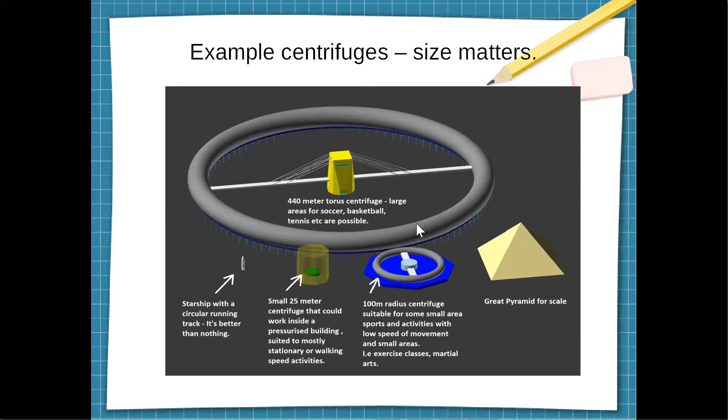So this is the first slide. I wanted to give an idea to people of how large a facility this would need to be. So with a small centrifuge, you basically have to stay in one place because the curvature of the acceleration as you move about is quite significant. So a small centrifuge can't have large open spaces, but a small centrifuge is still fine if you just want to be able to sleep or sit at a desk. So I thought initially on Mars, a small colony might have a small centrifuge, which is inside a building, much like the ones NASA use for their training.

They might be bigger than that, but generally you can't move around much, and there are significant distortions in the way the gravity works. So the next step up from that, I should go back actually. When the settlers first arrived, they may actually be in a very small spacecraft, or actually it's quite large, a starship, similar to what Elon Musk is envisaging. In a craft that size, you can have a running track where people would run around the track. And if you sprinted fast enough, you would actually generate a centrifugal force equal to Earth's gravity. So that would always be available to anyone on Mars who arrives on the surface.

In future, they would go to the next size torus, or this facility here, and then they might build something bigger. And for scale here, I've got a picture of the Great Pyramid of Giza. So it is a significant amount of materials and effort to build something this big, but if you're aiming to have a city of 100,000 people or something, this scale of building becomes feasible.

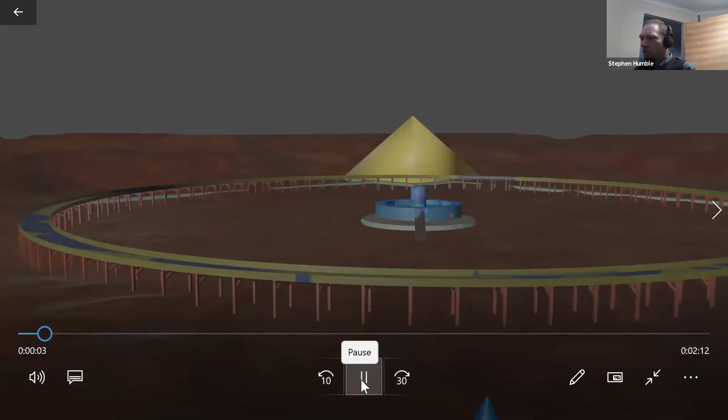Now, I think what I'll do next is I'll bring up the video I made. So this little guy here, can you guys see that? I hope so. He's supposed to be about the size of a 1.8 meter tall fellow, and behind him is a starship. And I'll play the video, and this gives a run over. So we zoom out. There's the foundation of the centrifuge. It's got a center hub and an outside running track. There's some motors, which are kind of like train motors.

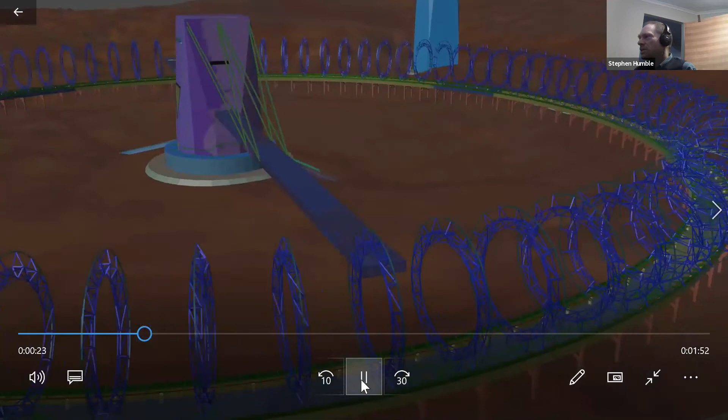Then there arrives the outer hull of the torus and the central hub and an access bridge. The access bridge is in part supported by suspension cables. Inside the torus, I've hidden the outside hull for now. There are frames, and in those frames, we have large sectors which are able to rotate so that as the torus speeds up, they can tilt so that people always are standing on a flat surface.

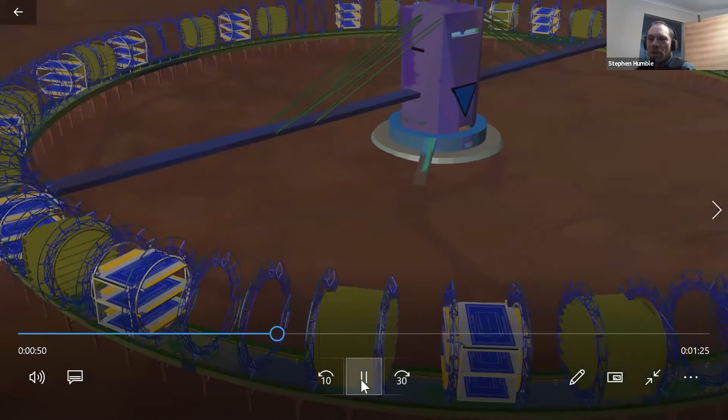Now, this thing is absolutely enormous, about 250,000 tons, but it gradually speeds up. And as you see here in the video, it's slowly speeding up. In reality, this would probably take over an hour to reach full speed. And we'll show you how it works down here.

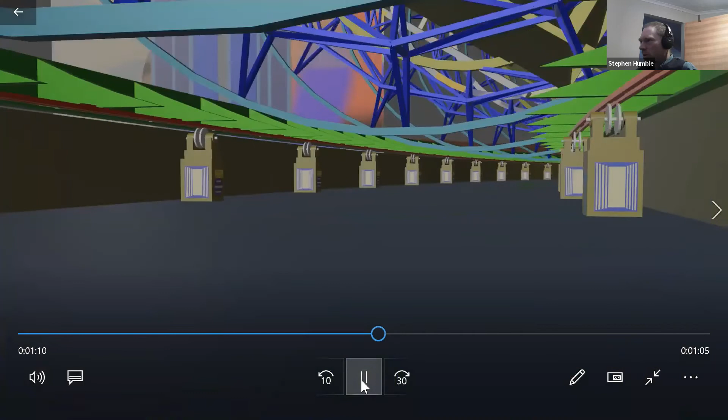So underneath, we've got a train track style system, and this area under here is actually going to be pressurized at about 15% of Earth's atmospheric pressure. And that helps support the enormous weight of this torus as it spins. So it's kind of like a hover train or a hovercraft.

Then in the central hub here, we'll walk along the ground here, and you can go up a ramp. And at the center of the hub, even though the outside is going to be spinning at about 230 kilometers an hour, the center hub is only doing about 20 kilometers at the point where we enter it. So you can basically jump over that and get into the moving part of the system.

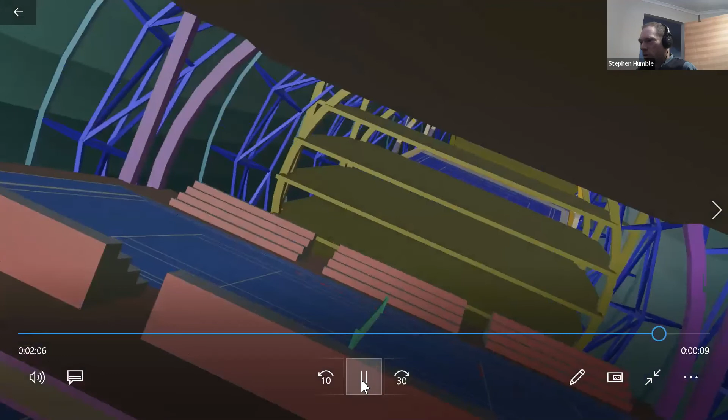Then we can go up here to these access arms. There would be airlocks and so on in this system, of course. I don't show these in the video. But we travel down to the center, down the access arms, and then inside the torus, we have the sector pods, which are at this point where we're doing 230 kilometers an hour, tilted at an angle of 70 degrees.

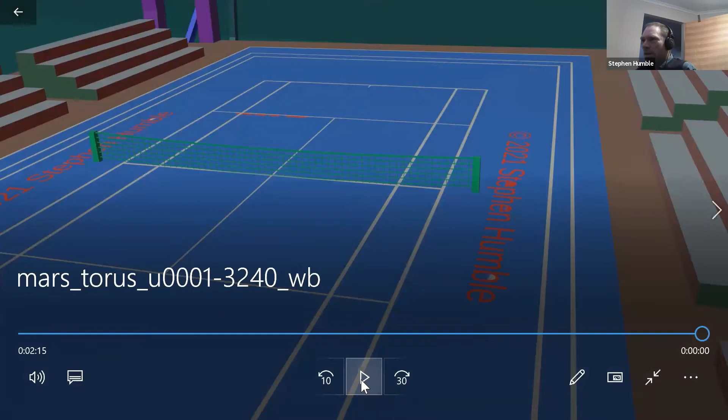And here's one of our stadium type areas. We've got a tennis court in this one here. So the tennis court, the outside lines, the size of a full stadium tournament court. So that's actually similar in size to what you'd use for indoor soccer or basketball or some other indoor sports. So this is a good size for the inhabitants of Mars to have an Earth-like area where they can play the kind of sports that you would play on Earth. Now, back to the presentation slides.

The reason the pods have to tilt at 70 degrees is when you add Mars gravity and the centrifugal force from the 3.7 meters a second of Mars gravity together, you get an angle of 70 degrees, and at that angle you get Earth-like gravity. So no matter what size centrifuge you use on Mars, if you want to reach Earth-like gravity, you will always be tilted at 70 degrees. Even for a small running track, it will always be 70 degrees. Just an interesting bit of trivia there.

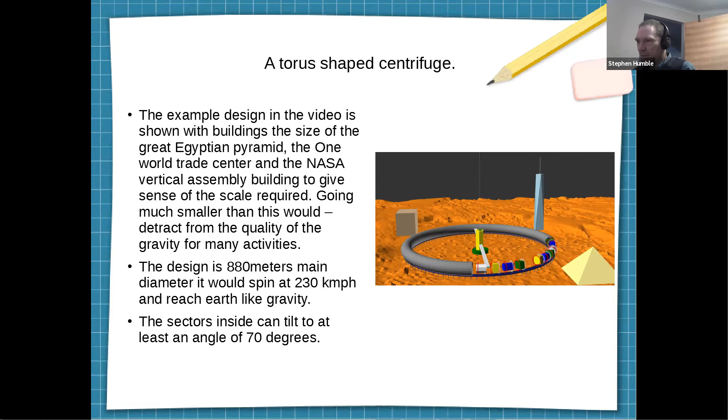The torus I'm showing in the video is about 880 meters diameter, and it has a small diameter, which is the circumference of the section, of 64 meters. That allows you to have fairly large buildings, about the size of a 10-story building inside.

Now, I'll go over some of the sort of activities that might be possible in the different sizes. So at the 25 meters, you probably can only do stationary things. That would kind of be like sitting in a small room and not being able to move around much, and getting in and out would be quite easy. You could stop and start a small centrifuge quite easily.

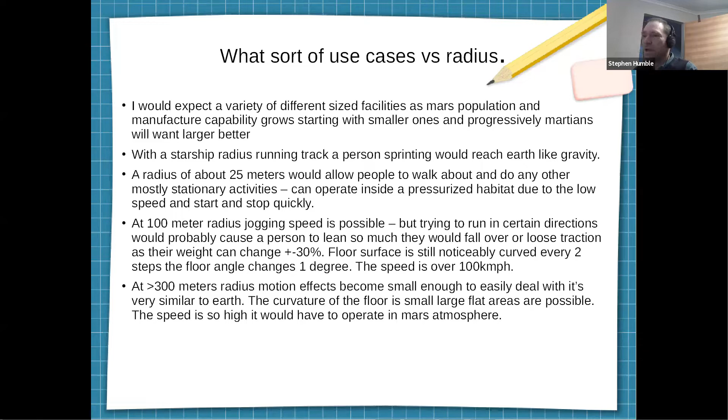At the 100-meter diameter radius, you get to the point where if you had that size centrifuge indoors, it's doing over 100 kilometers an hour. And so you get a tremendous amount of air drag at that speed. And you actually have to build your centrifuge completely outdoors, because although Mars has a thin atmosphere, it still produces a significant amount of aerodynamic drag. So at that point, you actually have to have the torus completely outdoors. And as you saw in the pictures here, you have an outdoor torus. Outdoors, you don't have to contend with as much aerodynamic drag.

Quality of the gravity. So even though this is a very large torus, people will still notice there are some effects. So there will be a need to have a slightly curved playing deck, which won't be a huge amount of curve across the distance of the playing floor. It would be about 1.5 degrees for a tennis court. From end to end, lengthways, it would be much less because of the way the centrifuge works and the angle of the floor. It's not a huge amount.

The Coriolis force and the Eötvös force have an effect when you're moving about. When you run in the direction that the torus is going, you would get around about 5 to 10% heavier if you sprinted really fast. In a smaller torus, that kind of effect becomes very significant.

In a really small torus, you could actually run so fast that you would basically become bound only by Mars gravity, and you would fall sideways across the floor if you tried to run too fast, because you would only be affected by Mars gravity, and with the playing deck at 70 degrees, you would basically slide straight off the floor. So a large torus minimizes that effect, and so you can play quite easily.

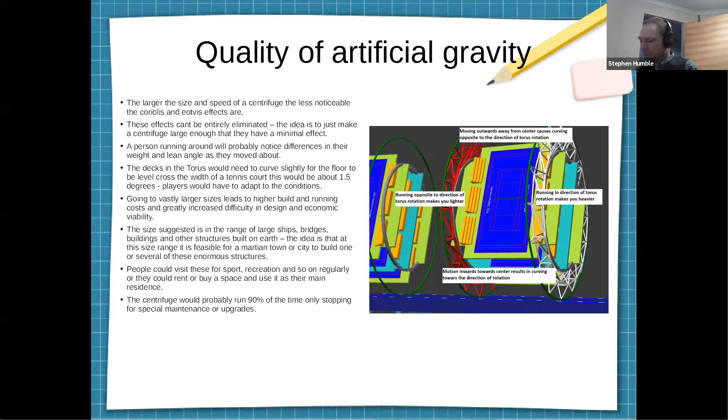So that's actually one of the reasons why having a torus like this is really good for exercise, because it means that people will remain adapted to Earth-like gravity, and there are benefits in that. Let me see if I can find some of those. Gone through that.

Going to some of the structural forces involved in building this thing. I didn't want to make it out of unobtainium or anything like that. To give an idea of what's involved in the strength of this thing, the air pressure inside is trying to stretch the entire structure out. That's like trying to rip this thing apart with a force of around 32 kilotons. That's basically like trying to lift 32,000 cars off a piece of rope. So the structure of the torus has to be very strong to withstand that.

And then because it's rotating, you can double that force. We add another 44 kilotons roughly for that as well. And you get a combined force from the air pressure and the centrifugal force equivalent to about 50,000 large motor vehicles. So for that reason, the hull of the torus has to be made out of very strong material, around 35 millimeter thick steel, to make it strong enough to withstand atmospheric pressure. And from that, you can work out the kind of mass you need and the structural integrity.

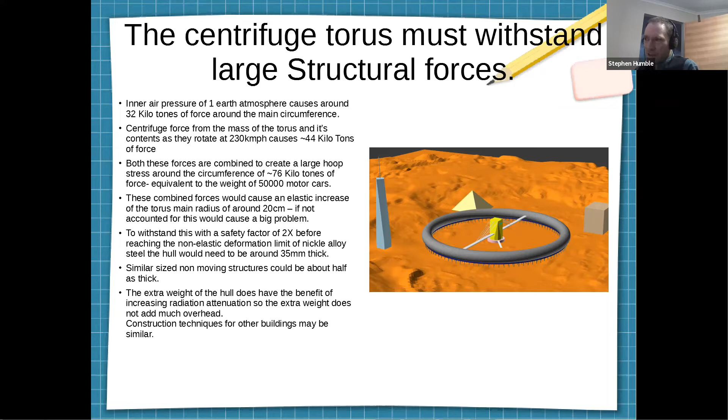So it does require a lot of investment. It is difficult to make, but those kinds of materials are actually quite common for large structures on Earth, like bridges. So as I see it, the kind of materials that I'm talking about here are readily available. I can go down to my local hardware store and actually buy a slab of 35 millimeter thick steel if I want. It's not cheap, but it's readily available. So this is not a design which is unobtainable or impossible to make if you have sufficient resources available.

So the suspension system has to deal with all those forces, and in operation the air pressure will actually stretch out the torus so that its radius changes by around 20 centimeters. And then on top of that, you've got thermal expansion and contraction, and that can change the radius by another 43 centimeters. So we're talking quite large distances.

So in the design, the motor drive systems would actually have to move left and right during operation under control of a computer system, which measures the expansion and contraction and tracks the torus so that it doesn't derail during operation. So there is significant design effort that has to go into the way everything works. The entire track of the torus also has to be able to handle those same expansion pressures.

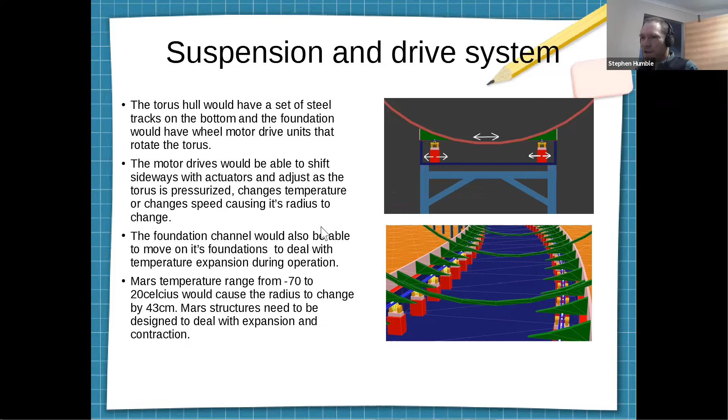The inside temperature of the torus is going to be about 20 degrees during operation, but Mars normal temperatures vary from 20 down to -70 around the equator. So you do need to take account of these things in a proper engineered design. So yeah, it's not straightforward, some of the problems you have to solve. Also, the air pressure inside helps support the weight.

Now, the wheel system is great, but you do get rolling resistance and wear and tear on the bearings. The kind of weight I envisaged was actually similar to the load-bearing capacity that you see in heavy freight trains. So it's not unreasonable that you could support the entire weight just using the wheels and the traction system. But by using air pressure, you can support far more weight and take most of the load off the wheel system. So it makes it a lot easier, and you reduce your energy use.

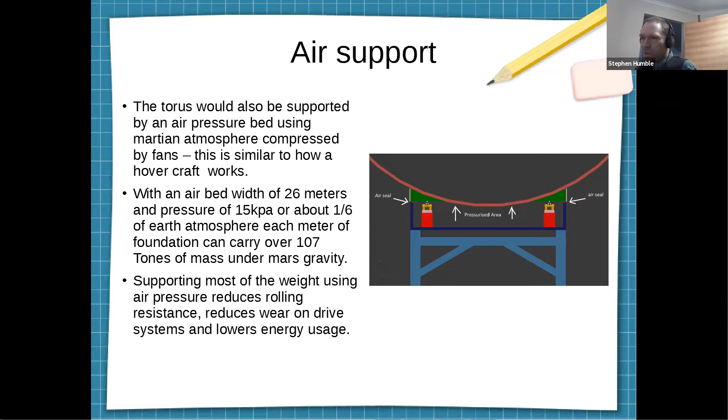The energy used to actually drive it is just to overcome some of the rolling resistance and the atmospheric drag from the access arms. We're talking somewhere around 10 to 20 megawatts to actually drive this system. So it's a substantial amount of power, but 10 megawatts is just a relatively small solar farm these days on Earth. So it's not unreasonable to expect a Martian civilization to develop something like this. As I said earlier, total weight of this thing, probably 250,000 tons.

To travel down the arms and so on, you would gradually be tilted more and more as you travel down it. So you would have pods similar to what you might see on the London wheel, where as it goes around, the pods tilt to always keep the people inside up the right way. So you would probably have something like that to travel up and down the arms of the torus

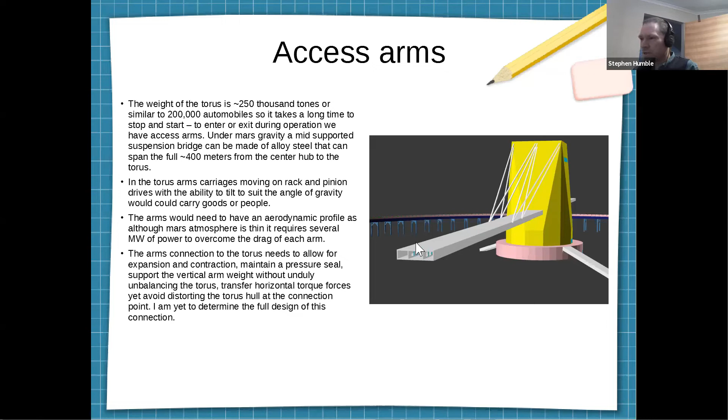as people enter and leave. And the connection where these join to the torus has to deal with a whole bunch of problems like the expansion and contraction. So I didn't actually get into the design of those yet, but there will be ways to deal with that. And the center hub uses a similar suspension system to the outside ring of the torus. So it has access doors, which you saw in the video. We can just enter through there for an airlock and go down the arms.

And there was also the idea that you could... Oh, we're getting near the end, are we? Yes, you have 5 more minutes.

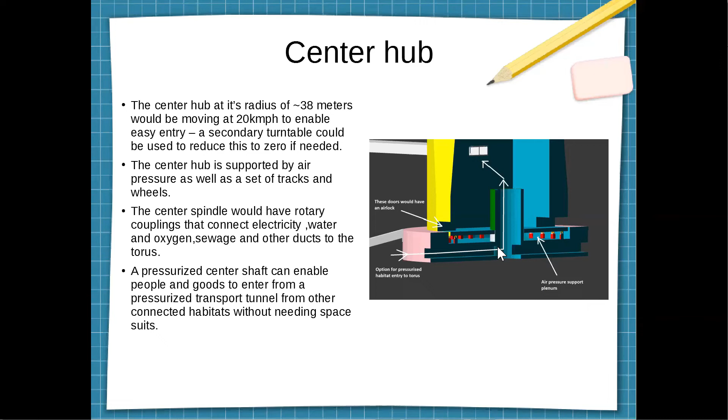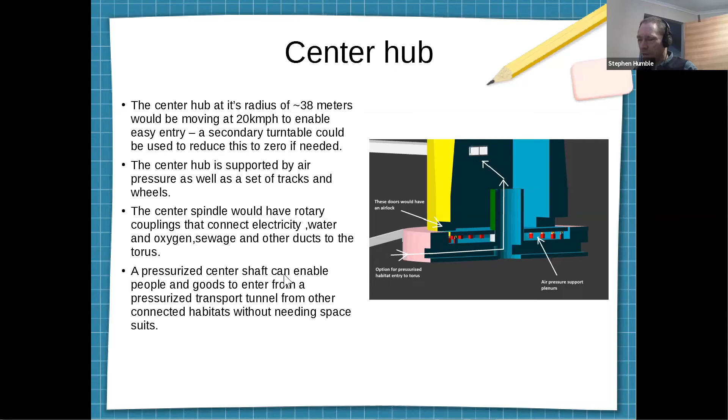Oh, okay, cool. So you could also enter this thing through a pressurized tunnel system. So people could go from one part of a colony to another that way without having to wear a spacesuit. The entire thing, of course, would be pressurized. Thermal considerations, the outer hull. This is going to be a common construction technique to basically every building on Mars. You would have acoustic damping on the inside layer, so it doesn't echo around like a concert hall.

You have a pressure hull; for a non-torus centrifuge of 60 meters diameter, it would be about 17 to 20 millimeters thick. Because we have to deal with all these extra forces, it's about 35 millimeters thick. Then you would probably have some radiation tile cladding using high hydrogen type materials like plastics or hydrated minerals. Then you have a thermal insulation barrier like rock wool. And then you have an outer cladding layer, which provides an aeroshell and just a physical protection barrier to the buildings. And most buildings on Mars and vehicles will use a similar construction technique.

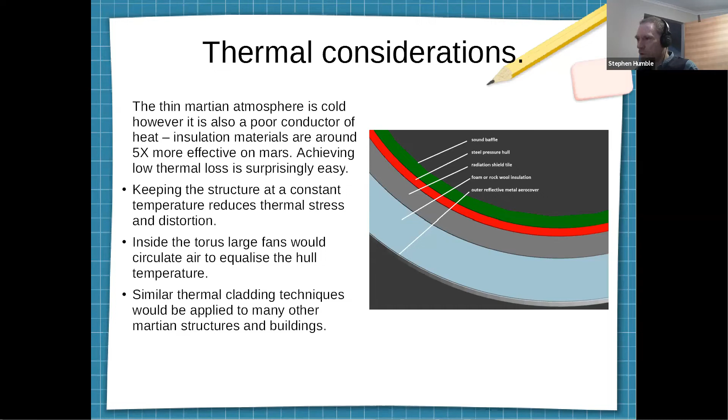Thermal insulation is surprisingly effective on Mars. Because of the thin atmosphere, it does make thermal insulation much more effective. You can get an R value of over 30 quite easily, and probably a lot higher if you use more exotic techniques.

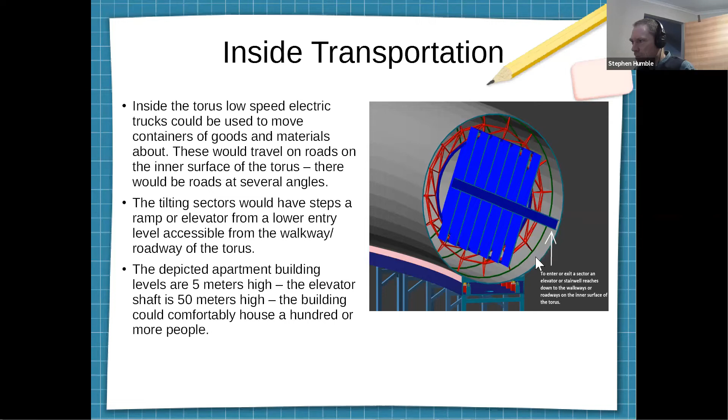This shows how people would get into the tilting sectors. They would have a shaft down to the bottom deck. People want to get in and out, they can just go to the bottom here, go in the shaft and go to any floor they want. And people would probably not be in this all the time. They'd be leaving and going as they want.

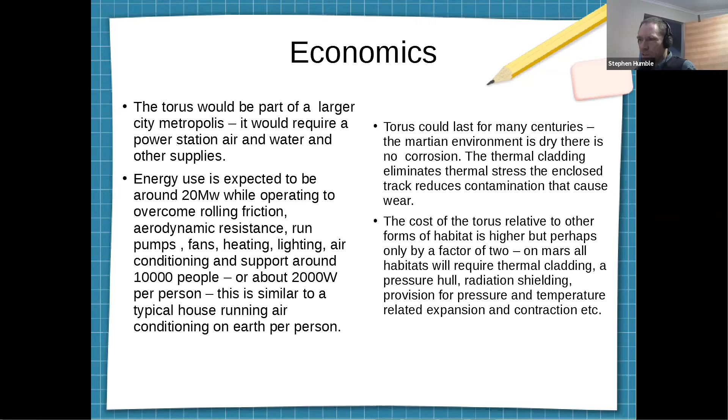The energy needs per person are actually quite meager. They're similar to a house on Earth. So it's not ridiculous to expect to be able to provide energy for this. The design cost in terms of the energy required to make the materials to build it would require a 1 gigawatt nuclear reactor to operate for about 5 months to produce all the steel required to build this thing. So it's kind of like something that you could envisage building on Earth for a moderately sized city in a relatively short amount of time.

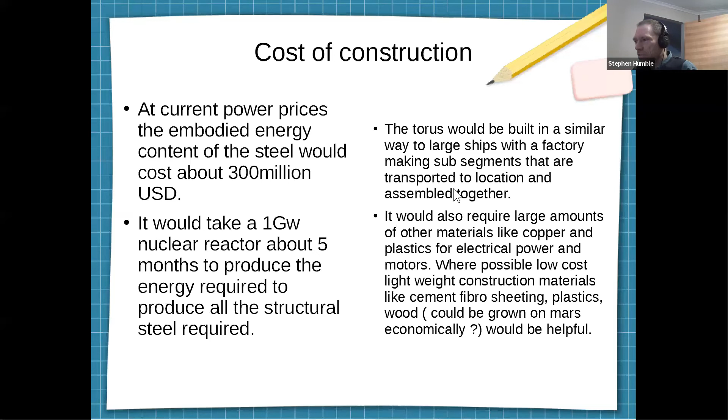I would imagine it would probably take 5 years and a population of about 100,000 people to build something like this. And you might have several of these in a large city. So compared to O'Neill cylinders, which I'm sure some people would have heard of, this is relatively more obtainable. I would consider an O'Neill cylinder to be almost a fantasy design. The outer hull on an O'Neill cylinder, as he envisaged, requires a thickness of steel of several meters, whereas what I'm talking about is only 35 millimeters thick.

So the design I'm showing here is obtainable and something that I actually believe the Martians in the future, maybe 50 years from now, would actually build. So I wanted to provide a visualization of that, and that was why I made the video, to get a feel of how it would look and feel.

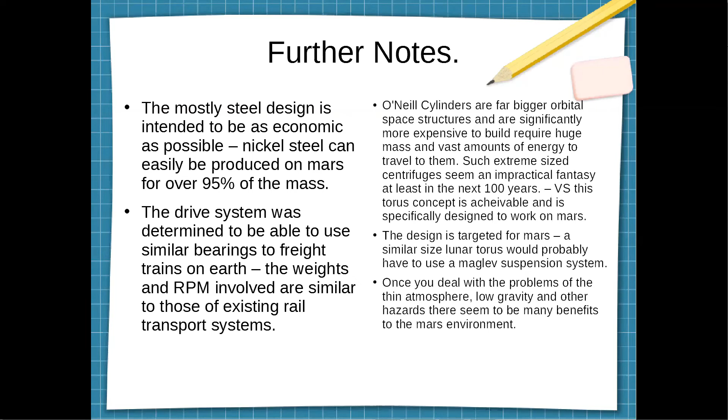This is from Douglas, and he would like to know, how would people and cargo enter and exit the complex once the centrifuge has already been started in rotation? That's a good question. So as you saw in the video, because the outside's going 230 kilometers an hour, you can't directly enter that part there without a great deal of difficulty. So the center hub, because that's at the center at that particular radius, it's only doing 20 kilometers an hour.

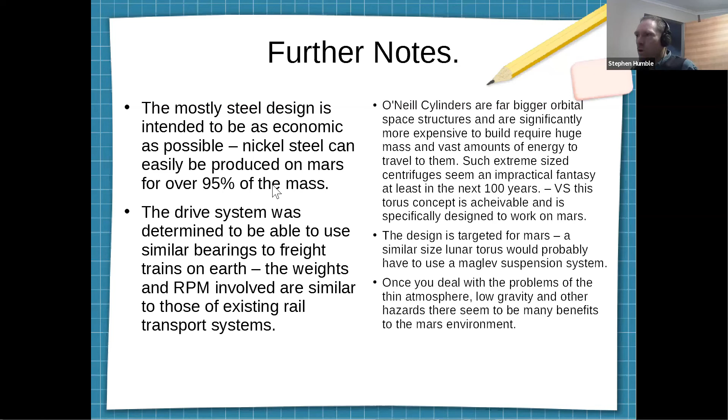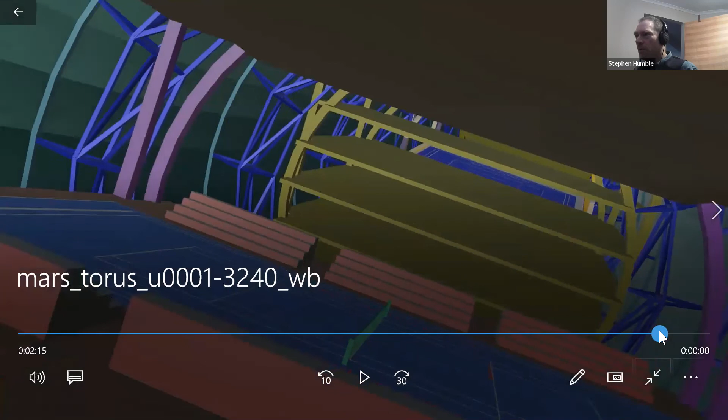And at that point, as you move down, you're now in an Earth-like gravity environment, and you would be tilted at 70 degrees. So in operation, these pods are tilted at 70 degrees, but because you've got Mars gravity and the centrifugal force, to a person standing on the deck playing tennis or basketball or whatever, they're going to be upright. So that's how you get into the torus, through that system. And it's actually relatively small.

You could actually walk in there through those doors with a spacesuit on, or come through a subway system through the center shaft, which you saw just here. This shaft here would allow you to come through a subway system up that shaft and do the same thing. So there's a couple of ways you can bring goods and services into the torus through those things. So I hope that explained it well enough.

Thank you, Stephen. We have a couple minutes to answer one more question. And this question is from Peyton. He said that he heard that you used Blender to create this project. What are the advantages of Blender in modeling large-scale projects like this? And is it possible, or maybe a good idea, to use CAD programs more suited toward product design, such as Fusion 360, the app that Peyton uses most?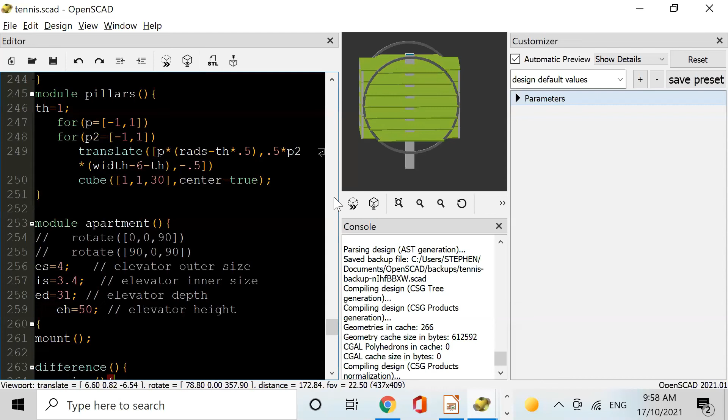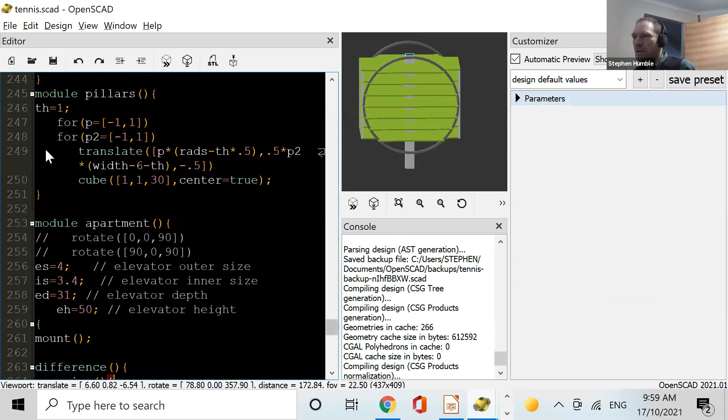I actually didn't just use Blender. I used Blender to create the visualization. The primary program I used was a program called OpenSCAD, and that's a parametric design tool. I'll just quickly bring up a window of that. I hope you guys can see this. So this is the modeling tool I use, and I create all my models using a parametric design.

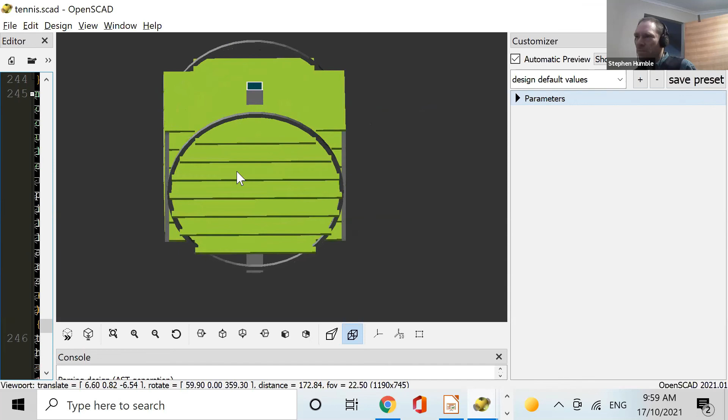That allows me to change sizes, and it's a solid geometry engine, and you can actually take these models and print them out. I've created a few things and printed them on a 3D printer, and this allows you to create very precise designs. Everything here is measured to whatever degree of precision you want. So this particular image here is one of the pods, for example.

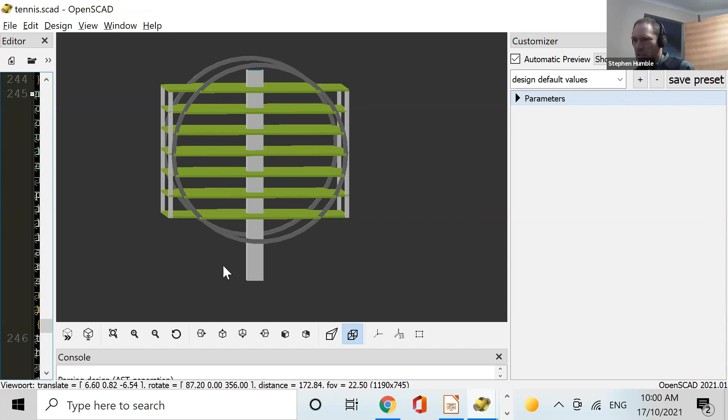This is an outer bearing on which the sectors would rotate. There's an elevator shaft in the full design. This elevator shaft here reaches to the bottom of the torus. I can go back to another window I've got open. That would be how you look through there. So there's that elevator shaft. So what I do is I take my SCAD models, I import them as STLs into Blender.

Then in Blender, I create the surface coloration, the texturing, to create that nice three-dimensional visualization animation you saw. So I do actually use a CAD program. Blender, as you notice, is probably not the right tool if you want to create a precision design. So I kind of use two different tools for that. I hope that explained it.